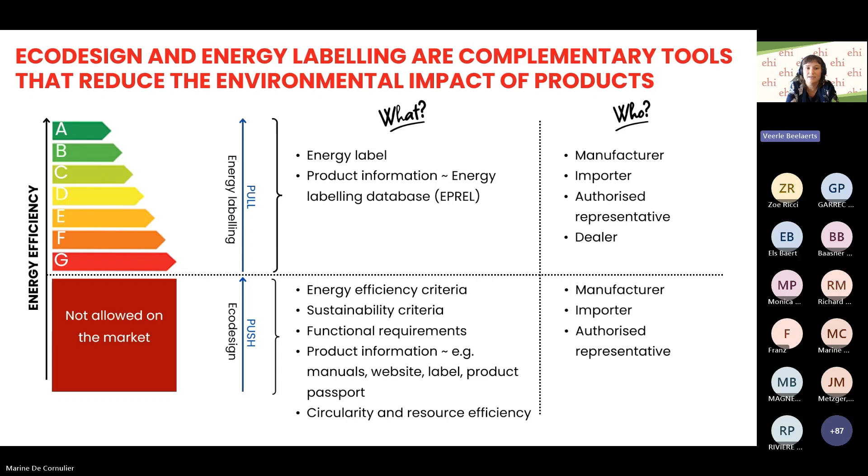Next slide, please. So now that we all have an understanding of what eco-design and energy labeling is, I wanted to show you a bit since when we started working on policies that improve the energy efficiency of products. Here I focus on energy efficiency because that was the original purpose of eco-design and energy labeling.

From 1992 there were already energy labeling regulations available - there was energy labeling for household appliances, and also energy efficiency measures for boilers already existed in the Boiler Efficiency Directive. It's only since 2005 that we have a real eco-design framework, and this was originally for energy using products, so products that consume energy themselves.

This was then expanded in 2009 to energy-related products, so not necessarily products that use energy themselves, but also products that make sure that other products use more energy. For example, badly insulated windows will make sure that your heating appliances use more energy. So this is typically an energy-related product.

In 2010, we stepped away from the 1992 energy labeling for household appliances to a new framework, which was for energy-related products. So that's the first, more modern energy labeling framework that existed.

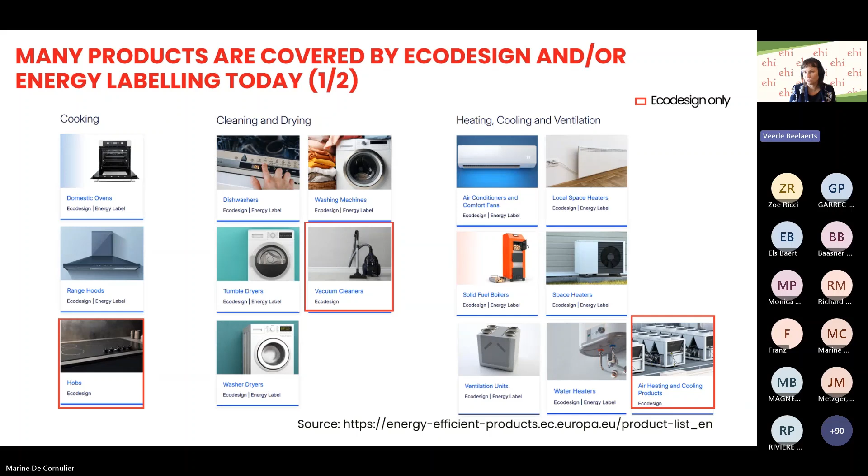The red frames show you those that only have an Ecodesign requirement, so where there's no energy labeling requirements. In principle, we have cooking appliances that are covered, cleaning and drying appliances, and heating, cooling, and ventilation appliances.

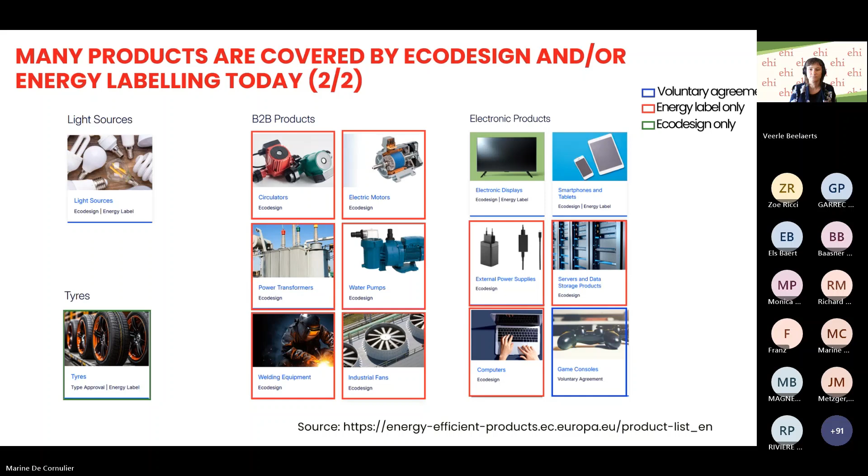Next slide. We also have tires and light sources. Then we have business-to-business products and electronic products. Here you see some other frames around the products - the green one is Ecodesign only, and the blue one is a voluntary agreement, meaning it's not a legislative file, but more a voluntary agreement among manufacturers to comply with certain requirements. Next slide, please.

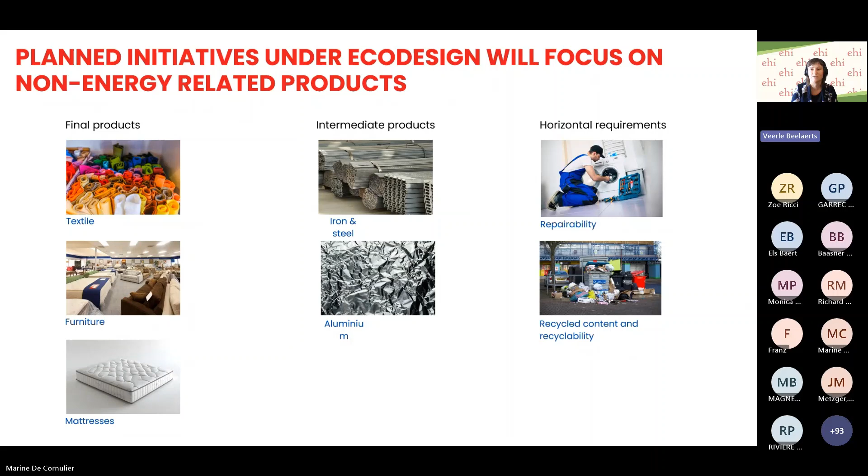And now I will dive a bit more into heating appliances. So the heating appliances that I will cover here are hydronic ones, space heaters and water heaters, because obviously that's the focus of our association. So I need to go into that topic a bit deeper, obviously.

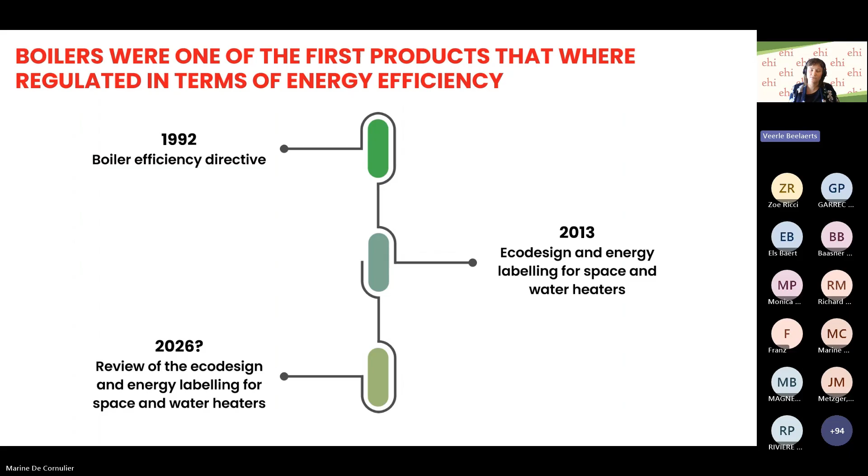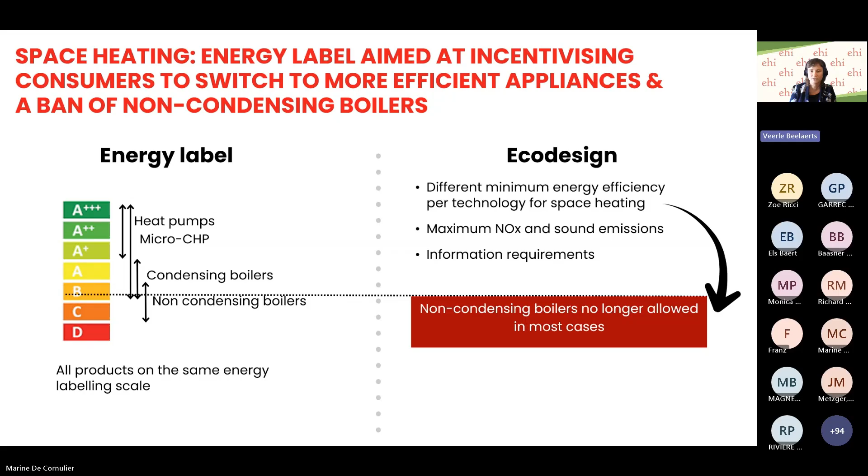I wanted to highlight one aspect in particular on the energy efficiency requirements. They were set as such that non-condensing boilers could not be placed on the market anymore in most of the cases. And if you move to the next slide, I can show you

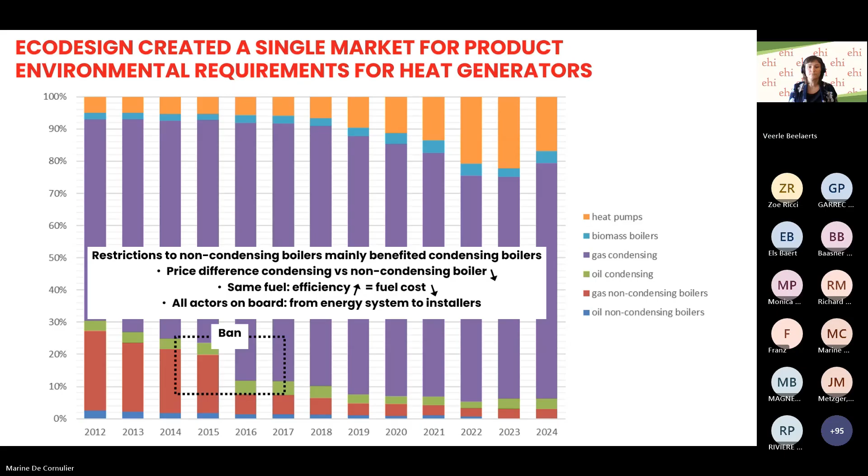Next slide, please, because here I wanted to show you another effect, or maybe not an effect, of the energy label. So while we see a clear effect on the market, on the sales data for Ecodesign, the energy label effect is not that clear. We see a gradual increase of heat pump sales, which is the orange on top, and then from 2019 onwards, bigger steps in the increasing amount of heat pump sales, and in 2024 a bit less, but still a bigger step.

According to us, this is not necessarily related to energy labeling, but rather political attention, the publication of the Green Deal, and member states who set in place financial support. Very often when we see political support combined with financial support, we see the uptake of heat pumps growing. Another important factor: in 2022 we had the energy crisis where energy cost for heat pumps became lower, so there was a clear benefit for the consumer to buy heat pumps, and this is also reflected in the sales data. Next slide, please.

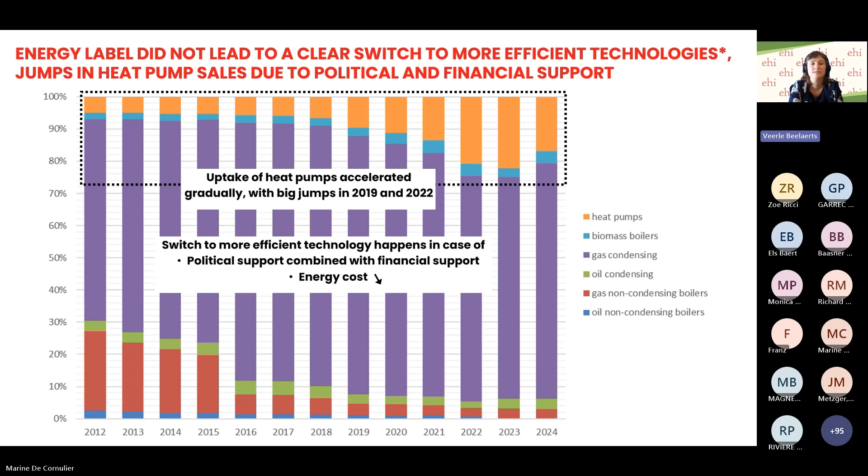Now, up until now, I explained a bit about the Ecodesign and Energy Labeling for heating appliances that we currently have to comply with. But as I said in the beginning, there is a review ongoing and the Commission is preparing something new, and I wanted to show you at least the things that we think might happen.

If I understood correctly, there will also be a requirement for the installer to show the energy label to the consumer, since heating appliances are not necessarily sold in a shop but rather directly by the installer when installing the appliance. It might be important that the installer shows that energy label before the consumer buys the appliance.

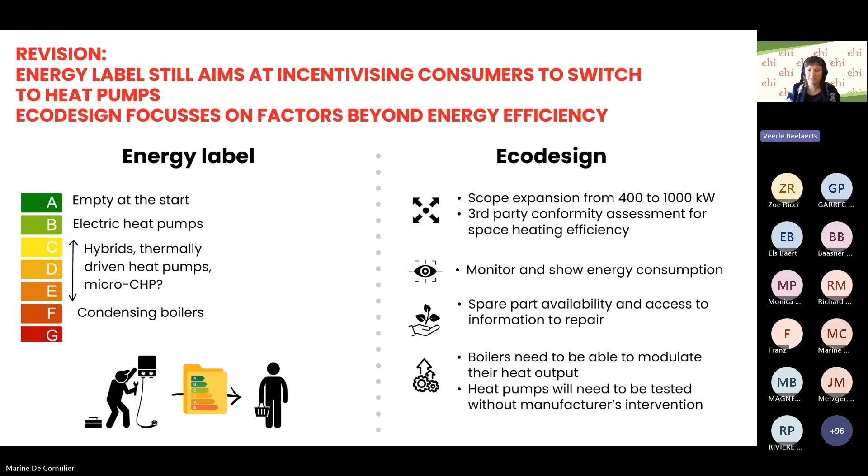Next slide, please. Now we go into the second part, which is a bit of a deep dive on market surveillance. Without proper market surveillance, the energy savings that I showed you earlier will not be achieved, but it will also lead to unfair competition.

Manufacturers who want to comply or who comply today invest a lot of resources into compliance, and if non-compliant products come to market without being checked, or are sold in other member states after being found non-compliant in one member state, that leads to unfair competition.

And when we look at the consumer, if products are not compliant, consumers might lose trust in those products. So it is important for us as an industry that compliance is being improved. For this purpose, we're going to have a little discussion with Philippe Rivière and Franz Zach.

Next slide please, Marine. I'm going to first introduce you to the speakers. Philippe Rivière holds a master's degree in engineering and a doctoral degree in energy, if I'm not mistaken, sorry if I'm not correct there. He was an associate professor from 2008 to 2021, where he also worked with the Commission already as a consultant on eco-design and energy labeling policies.